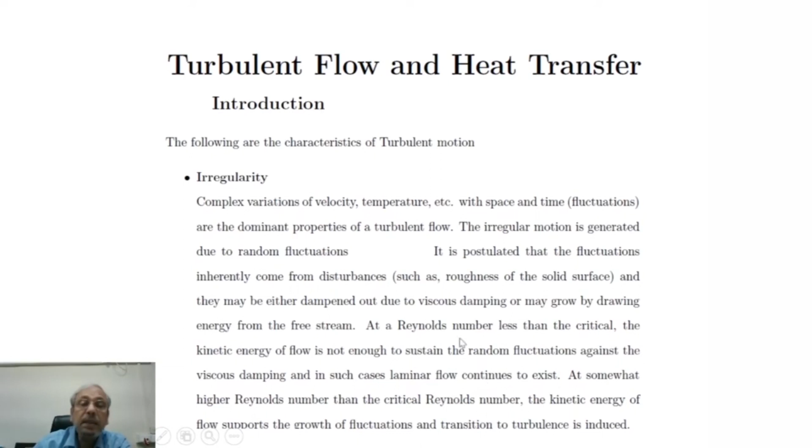Now, strong mixing is another feature. Heat transfer or momentum transfer are enhanced due to this strong mixing. So high transfer of momentum, heat, mass by fluctuating turbulent motion. Practically this is the most important feature.

Turbulent motion is always 3D. For a parallel flow, usually in laminar parallel flow, one component of velocity is non-trivial, other components are trivial. In a similar parallel flow situation, if we consider that the velocity in the mainstream direction is mean plus fluctuations, and y is the normal direction to the flow. Uppercase gamma is any space variable. Fluctuations are expected to be in the space. Even if the bulk motion is parallel, the fluctuation u prime being random varies in all directions.

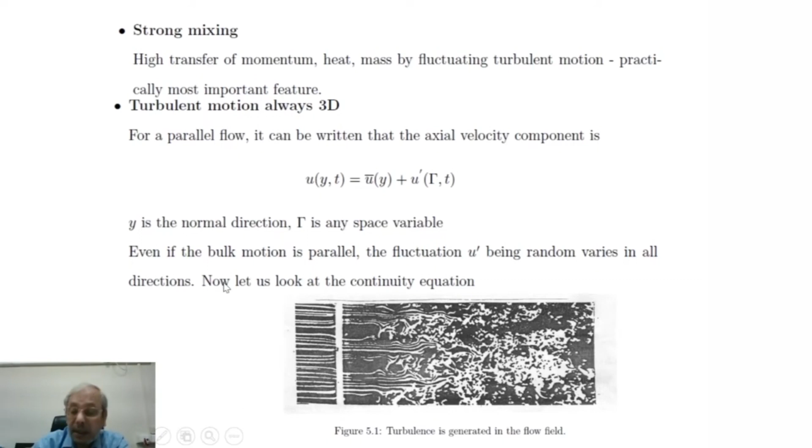Now let us look at the continuity equation. If we substitute u by u bar plus u prime, we can write: del u bar del x plus del u prime del x plus del v del y plus del w del z equal to 0. But del u prime del x is not equal to 0. The above equation depicts that y and z components of velocity exist even for the parallel flow if the flow is turbulent. That means u is u bar plus the fluctuation in u.

Even though there is no mean velocity in cross stream directions, in y direction or z direction, mean velocity we can write as 0, but there will be fluctuating components in order to satisfy the continuity equation. So if there is fluctuation in any component of motion, it will induce fluctuations in all other components of motion.

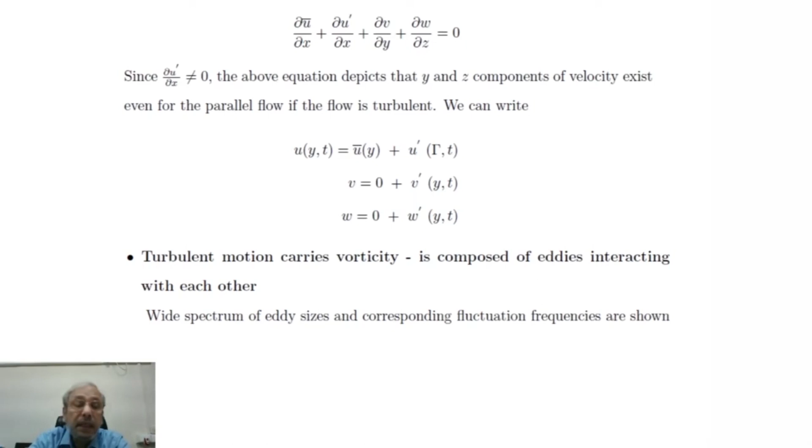Turbulent motion carries vorticity, and vorticity is composed of eddies interacting with each other. We can look at this picture. This is a free jet emanating from a nozzle, and if we place sensors at different locations at the same x distance from the outlet of the nozzle, we will be able to see the fluctuations at every location, and these fluctuations have no similarity if we look into signals at these 6 points. At any t, they are not similar, and they are also arbitrary at any instant for any particular signal.

So turbulent motion carries vorticity and consists of interacting eddies. A wide spectrum of eddy sizes and corresponding fluctuation frequencies are shown here. In a turbulent flow, energy is fed from large scales mainly to smaller scales by nonlinear processes.

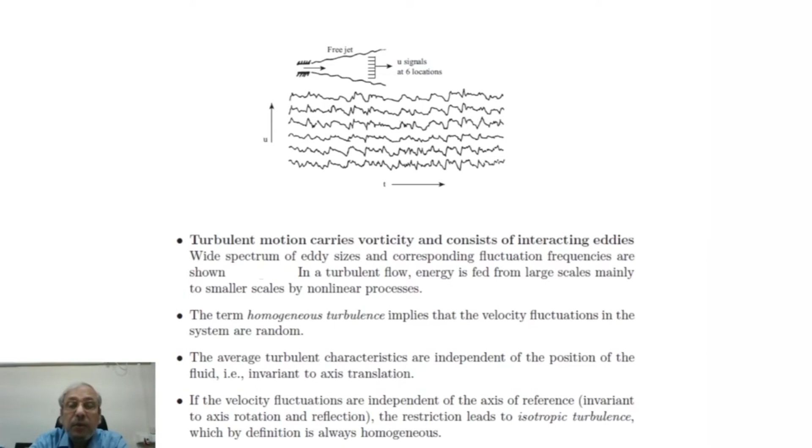Now, we will not take up various other issues about the turbulence physics. We will take a route to the classical idealization of turbulent flows, so that turbulent flow situations can be handled with a good degree of accuracy. Usually for this, we go for statistical calculation methods, where details of turbulent fluctuations are not considered. Hence, the statistical approach is taken and turbulence is averaged out.

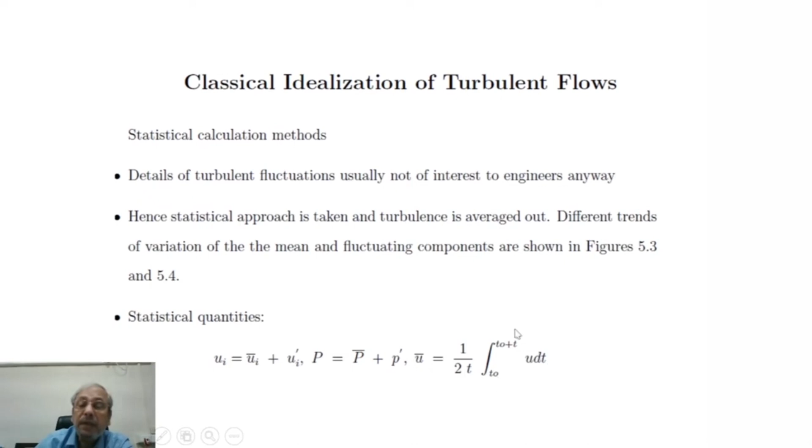Different trends of variation of the mean and fluctuating components are shown in a figure in the next slide, where we can consider all the velocity components as the summation of mean and fluctuations, pressure as mean pressure and fluctuating pressure, and this mean is basically the time mean component over a time interval.

So here we have shown a steady mean motion, that means the instantaneous velocity can be decomposed into a mean component and a fluctuating component. Now, fluctuating components are such that if we perform the mean of the signal, or the mean component, then the mean is not varying with time. So over a large time scale, we can see the mean is steady. But if we reduce the time scale, then we can observe or appreciate the fluctuations.

Similarly, this mean motion can also be unsteady mean motion. Here we can see the fluctuating components are there, but when we determine the average velocity and observe its variation, we will see the average velocity is also changing with time. And this variation has a different time period, which is much larger than the turbulence time scale. So here the time period is very small for the fluctuating components, so frequency is high. Here the time period is large and the frequency is much less.

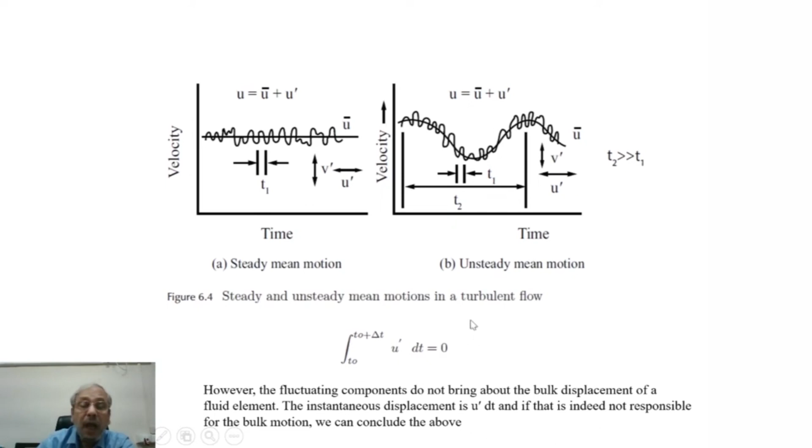Now, the fluctuating components do not bring about the bulk displacement of a fluid element. The instantaneous displacement is u prime dt, and if that is indeed not responsible for the bulk motion, then we can write the integral from T naught to T naught plus delta t, the time window, of u fluctuation dt, and this has to be 0. There is no bulk motion and these are all instantaneous displacements.

Due to the interaction of fluctuating components, macroscopic momentum transport takes place. Therefore, the interaction effect between two fluctuating components over a long period is non-zero. So between two fluctuating components like u prime v prime, if we perform the integral over a time window, it is non-zero. We take the time average of these two integrals; then u prime bar, the average of u prime, is 0, since this integral is 0. And u prime v prime bar is non-zero, since the integral of u prime v prime dt is non-zero. So u prime bar is 0, but the quadratic quantities, u prime v prime, u prime w prime, those are non-zero.

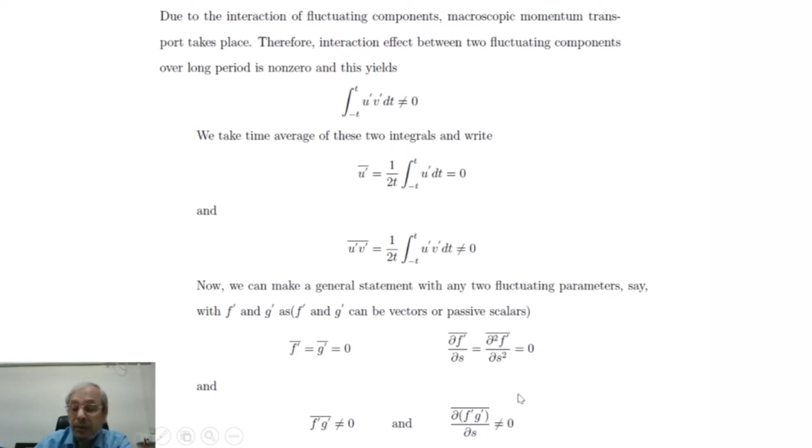So we shall state some rules of operating on mean time averages. If f and g are two dependent variables and s denotes any one of the independent variables, x, y, z or t, we can write df/ds bar equals d/ds of f bar, and the integral of f ds bar is the integral of f bar ds.

With this philosophy, this is called Reynolds decomposition, that is, instantaneous quantities expressed in terms of average and fluctuation. So u equals u bar plus u prime, v equals v bar plus v prime, w equals w bar plus w prime, p equals p bar plus p prime. If we plug this into the continuity equation and do a little algebra, we get two results. One is divergence of ui bar equals 0, that means del x of u bar plus del y of v bar plus del z of w bar equals 0. And divergence of ui prime is 0, that means del x of u prime plus del y of v prime plus del z of w prime equals 0.

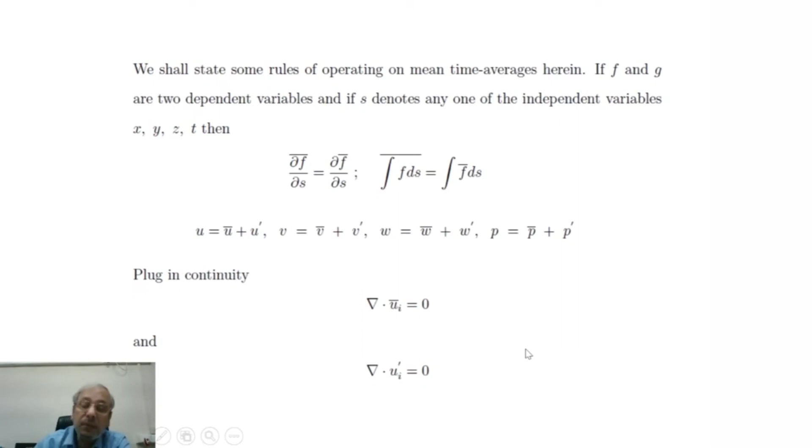Now we can write the x momentum equation in conservative form, apply this Reynolds decomposition and then average out the entire equation to see the time averaged equation for x momentum. So basically, as I said, the conservative form of the equation: rho times del u del t plus del x of u square plus del y of uv plus del z of uw. This is the left hand side.

You can easily see that if we find out the derivatives and then apply the continuity equation, we will get del u del t plus u del u del x plus v del u del y plus w del u del z. That is usually referred to as non-conservative form, and we can just rewrite the same equation retaining everything intact in conservative form, equal to minus del p del x plus mu times del 2u del x2 plus del 2u del y2 plus del 2u del z2. And then, as we decided, we'll apply Reynolds decomposition.

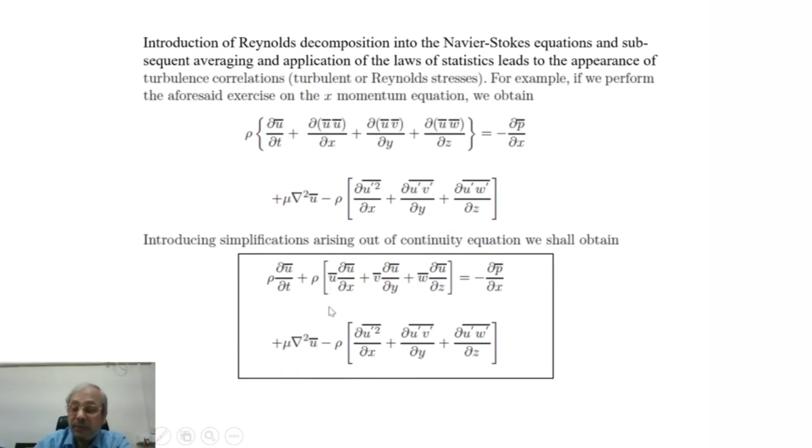And if we write term by term, we will get this expression. The x momentum, y momentum and z momentum equations for turbulent flow after time averaging can be written in this form using tensor notation. If we expand i equal to 1, 2, 3, j equal to 1, 2, 3, we will get all the respective components for the x, y and z momentum equations.

And the continuity equation is del del xi operated over ui bar. Here also, if we substitute i equal to 1, 2, 3, we will get del del x of u bar plus del del y of v bar plus del del z of w bar equal to 0. So this is the time averaged continuity equation.

Now we have more unknowns than the number of available equations. The modified system of equations cannot be closed within itself unless empirical relations are supplied from experiments to correlate the fluctuating components with the mean motion. And this is called the closure problem. This may sound a little complex to you, but let me explain.

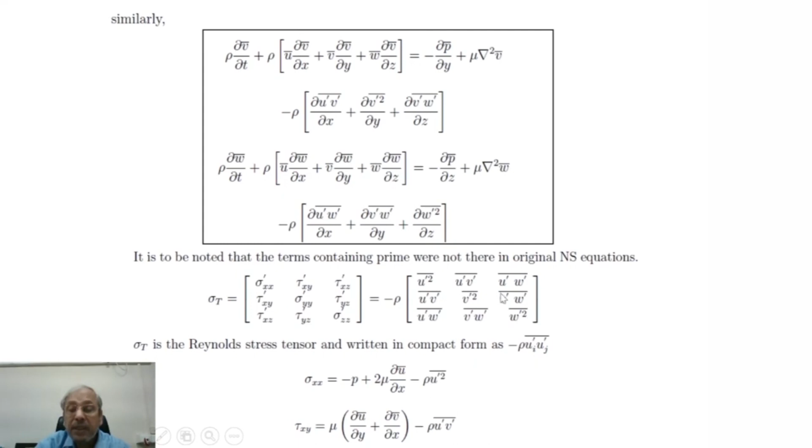Now here you have unknowns U average, V average, W average, P average. And additionally, you have U prime square bar, U prime V prime bar, U prime W prime bar, V prime square bar, V prime W prime bar, and W prime square bar. So 1, 2, 3, 4, 5, 6 more unknowns. These are symmetric terms, so really not 9 more unknowns, it is 6 more unknowns. So 4 plus 6, 10 unknowns.

And again, the equations are the mean equations in x, y, and z direction and the mean continuity equation. So 4 equations. That is why it is said that this problem cannot be closed now. In order to close it, you have to express these fluctuating components in terms of velocity gradients, that means del u bar del x, del u bar del y, del v bar del x, del v bar del y, and so on, which are basically stress components.

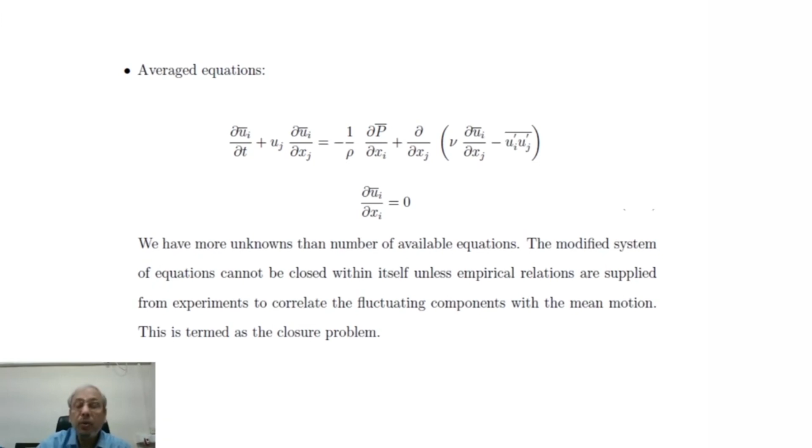So these fluctuating components have to be expressed in terms of time averaged velocity components to close the system. And that is why this is the closure problem. Turbulence stresses need to be determined with the aid of a turbulence model.

Here, only models for turbulent motions are discussed. So, we have not yet introduced subgrid scale, etc. So, this becomes irrelevant. This is for the turbulent motions.

And then we can say minus ui prime uj prime over bar equal to nu t times (del ui bar del xj plus del uj bar del xi). Del xj operated over ui bar, del xi operated over uj bar. And this is the stress component.

But we are writing additionally minus 2/3 k delta ij. This k is kinetic energy, and this delta ij is Kronecker delta. The term nu t is the turbulent viscosity, which is not known now, but it can be expressed in this way. So, if turbulent viscosity can be estimated, the term involving the Kronecker delta in this equation is so far unfamiliar. So, it is necessary to make an explanation for this, and K also, the kinetic energy.

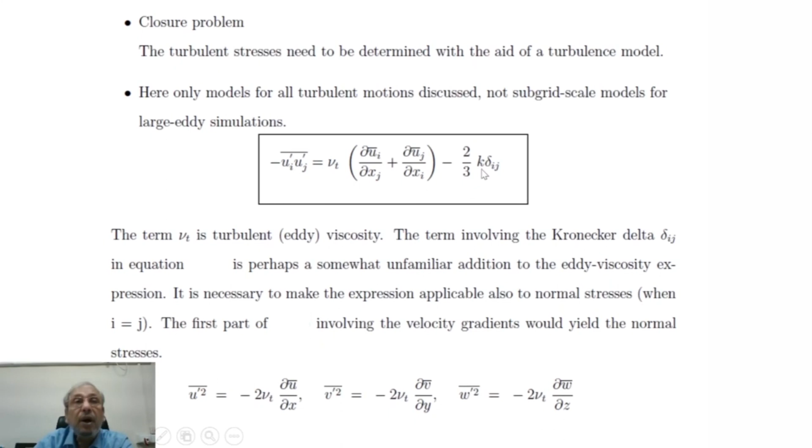So separately, K need not be determined while solving the equation. However, here it may be mentioned that K can be linked to intensity of turbulence, and intensity of turbulence in a flow field has to be defined, and this is usually recommended based on experimental observation, and this is basically intensity is root over 1/3, that means mean of u prime square bar plus v prime square bar plus w prime square bar.

So root over that divided by u infinity, that is the free stream velocity. So this is basically definition of turbulent intensity, and this is basically definition of turbulent kinetic energy. As such, from comparing these two, we can see that K by u infinity square is 1.5 I square. That can be found out, right?

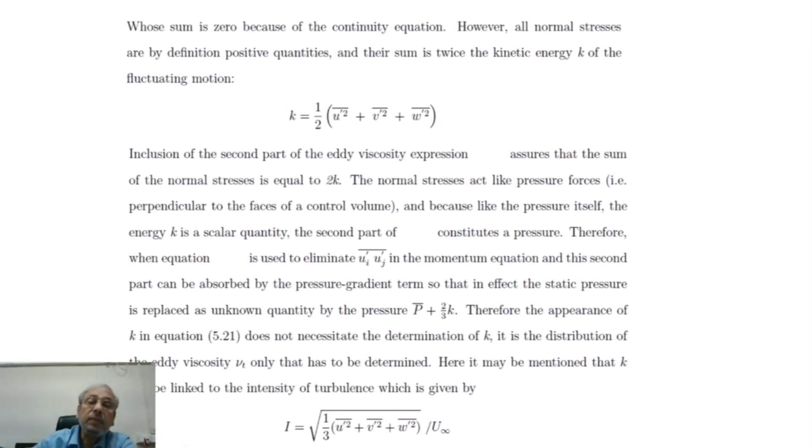Now we will look at Reynolds average form of energy equation. So energy equation, if we write as del T del t, this T is temperature, plus U del T del X plus V del T del Y plus W del T del Z equal to alpha times del 2T del X2 plus del 2T del Y2 plus del 2T del Z2.

And we apply Reynolds decomposition. U is U bar plus U prime. V is V bar plus V prime. W is W bar plus W prime. And T is time average temperature plus fluctuating component of temperature. This is instantaneous temperature. And then just what we did for the momentum equation, we substitute T by T bar plus T prime.

We write conservative form of convective terms. Then substitute u by u bar plus u prime, t by t bar plus t prime, v by v bar plus v prime, w by w bar plus w prime, and t by t bar plus t prime, and apply over bar and operate following the laws of statistics.

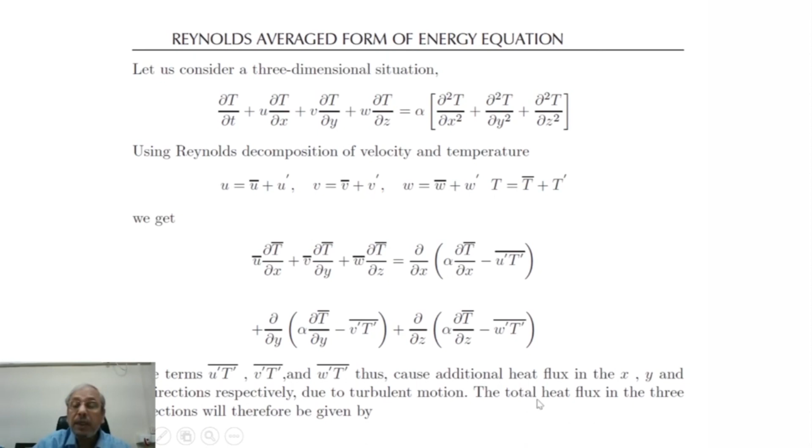Now u prime t prime over bar, v prime t prime over bar, and w prime t prime over bar, they cause additional heat flux in the x, y and z direction due to turbulent mixing, due to the turbulent motion.

The total heat flux in three directions, now we can write qx double prime equal to minus rho Cp times alpha del t bar del x minus u prime t prime over bar, qy double prime, heat flux in the y direction, is minus rho Cp into alpha del t bar del y minus v prime t prime over bar, and qz double prime equal to minus rho Cp times alpha del del z of t bar minus w prime t prime over bar.

So this minus w prime t prime over bar multiplied with minus rho Cp, that is the additional contribution of the heat flux in z direction. Similarly, v prime t prime over bar with rho Cp, when it is multiplied, that is the additional contribution in the y direction heat flux, and rho Cp multiplied by u prime t prime over bar, that is additional contribution in the x direction heat flux.

As in the case of turbulent transport of momentum, it is convenient to define eddy viscosity or turbulent viscosity, we have already done that, to study the turbulent transport of thermal energy. A term is introduced here, which is turbulent thermal diffusivity, alpha T.

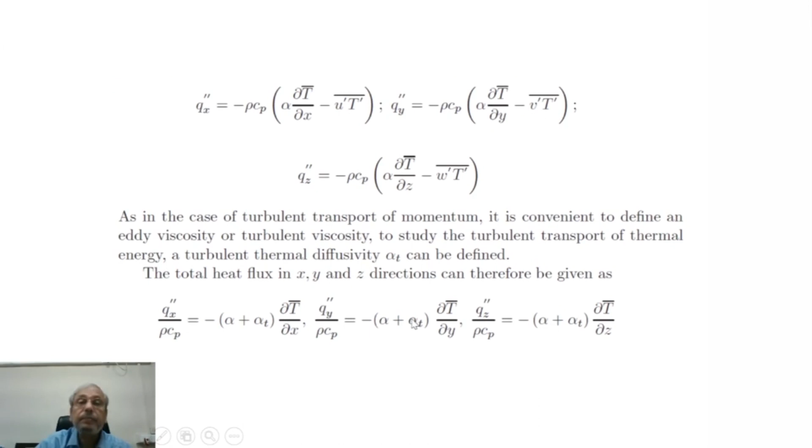And now we have a little discussion about alpha t. Like eddy viscosity, alpha t is not a fluid property but depends on the state of turbulence. In fact, the Reynolds analogy between heat and momentum transport suggests alpha t equals nu t, what we obtain for closing the momentum equation, eddy viscosity, divided by sigma t. The denominator sigma t is called turbulent Prandtl number.

So when we determine nu t to close the momentum equation, that same nu t, if it is divided by sigma t, which is the Prandtl number, will give alpha t, which is turbulent diffusivity or eddy diffusivity.

Experiments have shown sigma t, that is turbulent Prandtl number, varies very little across the flow. Many models make use of sigma t as a constant. For the flow of air, a value of 0.9 may be chosen. So our task will be to find out nu t correctly. We'll use that for closing the momentum equation.

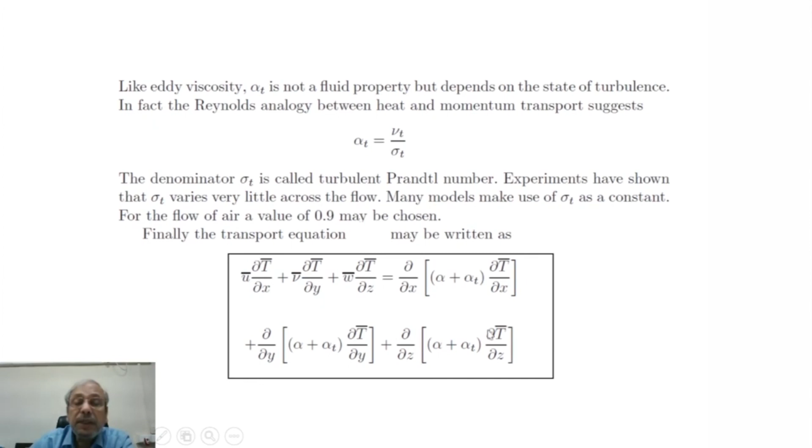And having known nu T, if we know the turbulent Prandtl number for a particular fluid, like for air it is 0.9, then we can find out alpha T, the turbulent thermal diffusivity, and together with thermal diffusivity we can apply that to the energy equation and solve for temperature.